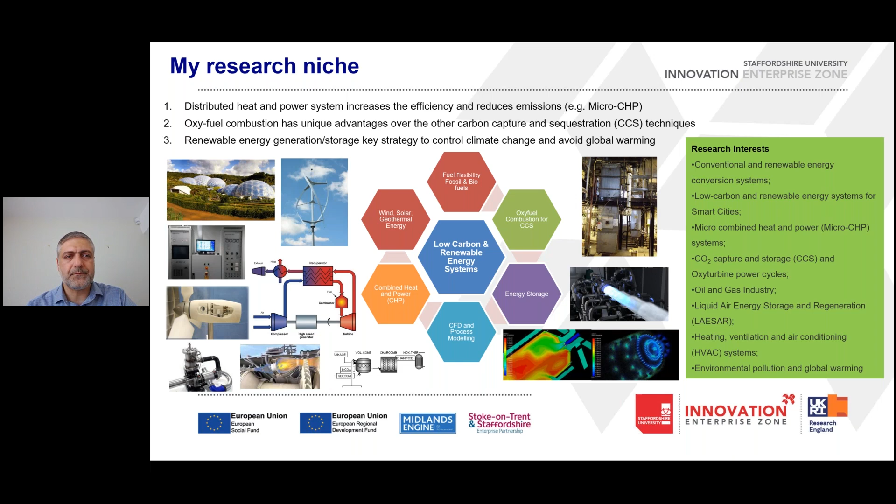The headline of today's talk: first of all, global warming. Is it real? Is it happening? And are we responsible or not?

We're going to talk about the Paris Agreement, which all nations came together to sign to tackle the issue of climate change and bring the increasing level of global temperature to less than 2 degrees, or if possible, well below 2 degrees.

I'm going to show you UK electricity sources live, because I want to show you the position of combined heat and power systems within the portfolio of electricity generation in the UK and worldwide.

Then we're going to discuss the benefits of micro CHP systems for small smart buildings. There are four major prime movers: fuel cell technology, gas engines (piston or internal combustion engines), Stirling engines, and micro turbine CHPs.

And at the end, just a glance at how micro CHPs are required to be part of a smart grid, in which they have to be connected and available in smart cities.

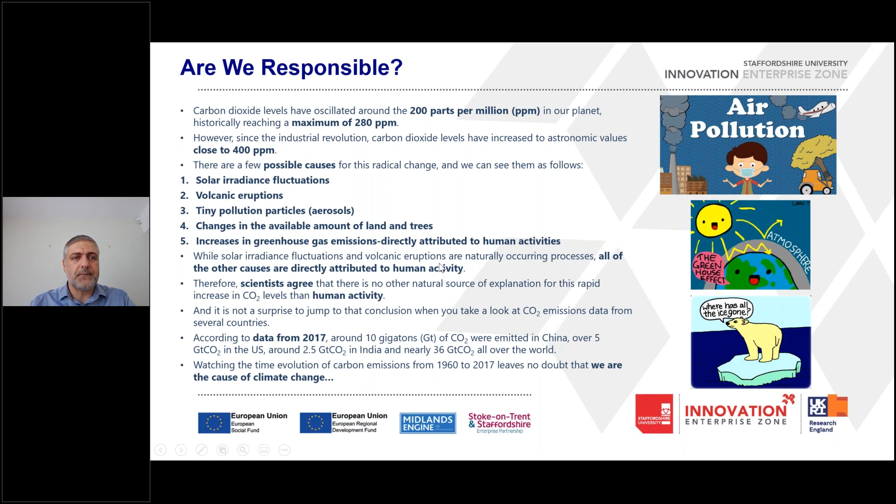Consequences of this increase in greenhouse gas emissions globally is going to be higher global temperatures, which will end up causing rising seawater levels.

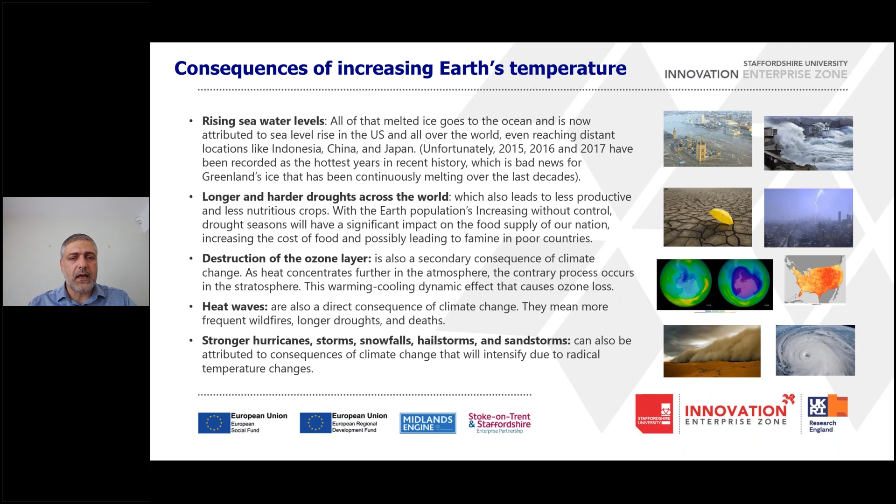We're already seeing longer and harder droughts across the world. There are destructions of ozone layers, all recorded and available. Heat waves are getting really challenging. Nowadays we see forest wildfires facing these heat waves and challenges of controlling forest fires. There are the strongest hurricanes, storms, snowfalls, hailstorms, and sandstorms, all evidence of the global warming that is happening.

At first glance, we think global warming is just a polar bear issue, but this is not what is happening already.

The Guardian has suggested we need to talk about climate emergencies, crisis, and breakdown. You see this picture in the Guardian, 17th of May - polar bears are approaching residential areas searching for food. This is really scary, what we see, what we're doing to our world.

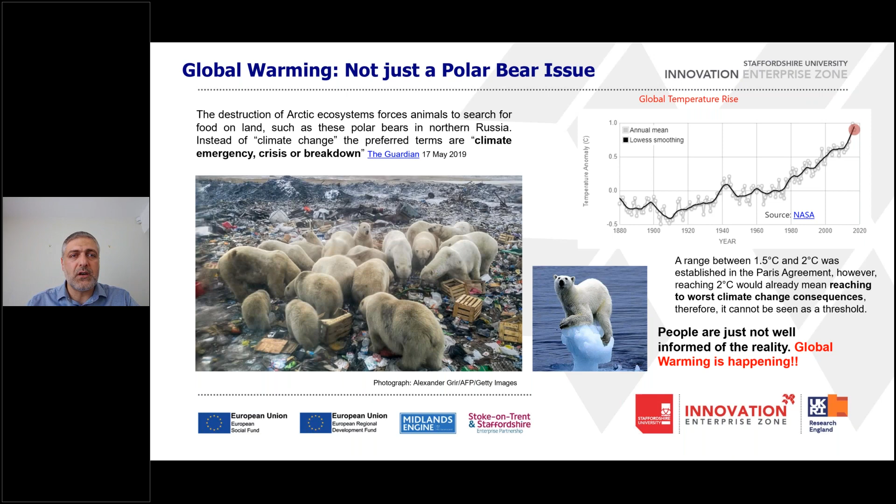Temperature recordings show an increase in temperature compared to pre-industrial levels, and this is because greenhouse gas emissions are being emitted day by day more than before. We have to control this temperature rise, otherwise we're going to see the crisis which I've indicated in the previous slide.

Fortunately, nations came together and agreed to control the temperature of the globe to well below 2 degrees C temperature rise, and if possible to less than 1.5 degrees.

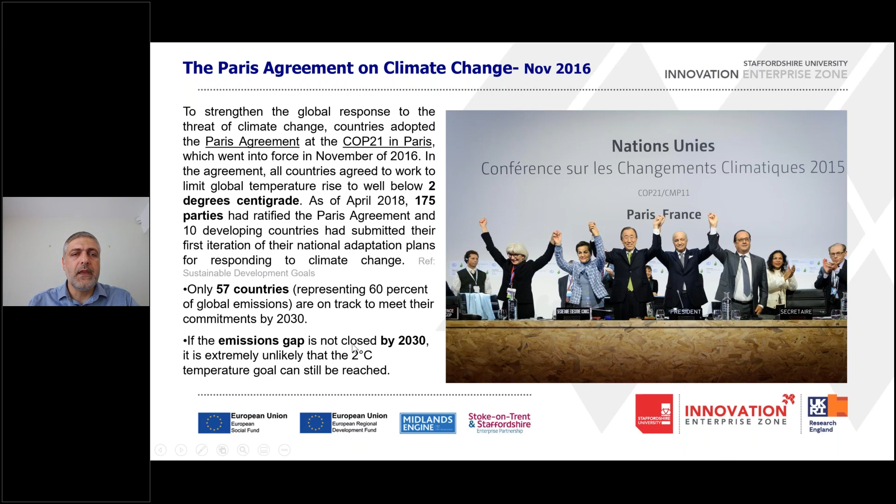This is quite important to see what technologies can address this and give us the opportunity to achieve this target. This is a report from the International Energy Agency, and it talks about the roles of different technologies in controlling the temperature to less than 2 degrees increase by 2050 and 2060.

The major technologies are: first of all, we need to use efficiency improvement in all combustion systems, in all power plants, in transportation, in industrial processes. So efficiency will have a share of 40%.

Using renewables will have a share of 35%. Fuel switching will have a share of 5%. Carbon capture and storage will have a share of 14%, and nuclear shows a share of 6%.

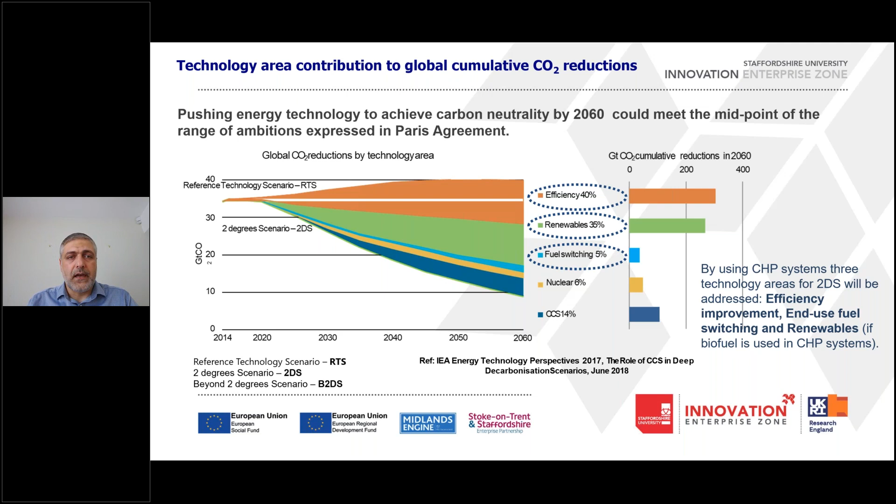Combined heat and power systems can play a positive role in ticking 3 boxes: efficiency improvement, renewables, and fuel switching. Today I'm going to give information regarding the available technologies which can help us remove or avoid carbon emissions by 2050 and 2060s.

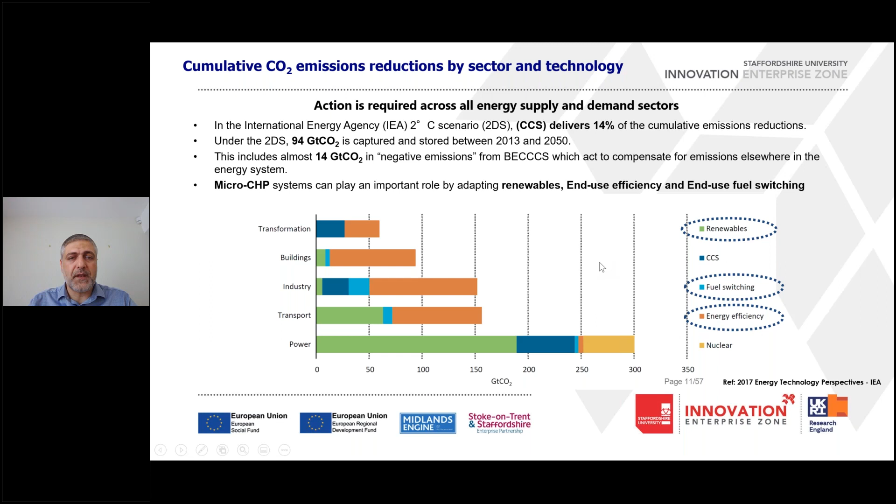This is one of the figures: 94 gigatons of carbon dioxide has to be captured or avoided by 2050. There are shares of different technologies, and micro CHPs and combined heat and power systems can play a very positive role in achieving these targets.

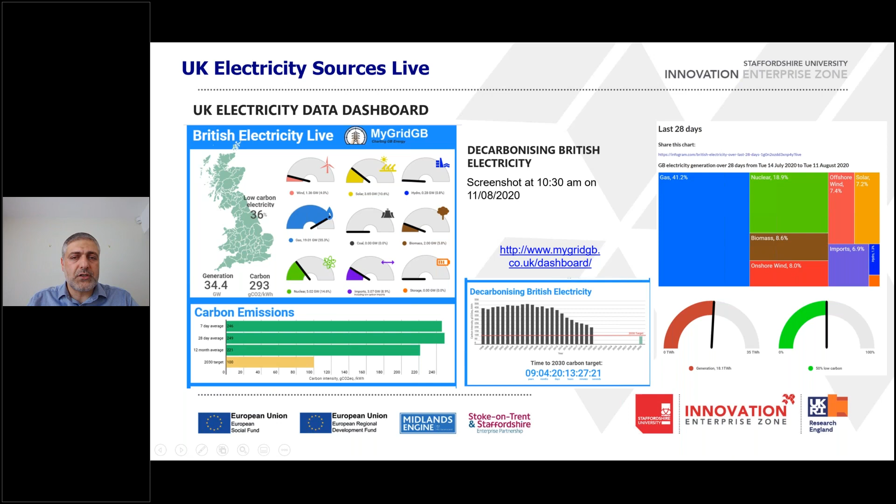There is a dashboard available which shows what the combination of different energy sources we're using is.

If you see this page, this is the live level - for instance, 3.7% of the current electricity right now comes from wind. Solar has got about a 20% share, which is quite impressive because of today's sunshine. Roughly about 50% comes from gas, and about 13 to 14% nuclear. Biomass has got a share of 5%. And as you can see, fortunately there is no coal combustion happening at the moment for British electricity live.

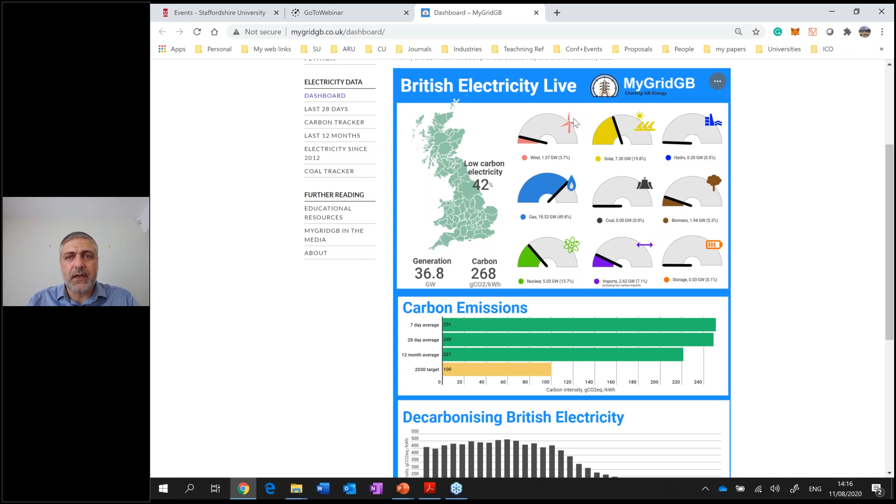There are targets on how to decarbonize British electricity. We're aiming to have 100 grams per kilowatt by 2030. Currently we are at about 220 grams per kilowatt hour of power generated.

So if I go back to slides, now why combined heat and power systems? I already mentioned the benefits of CHPs in terms of efficiency improvement. One of the major reasons for efficiency improvement is because we are avoiding transmission losses; in some cases it's 20–25% more efficient when we use a decentralized combined heat and power system.

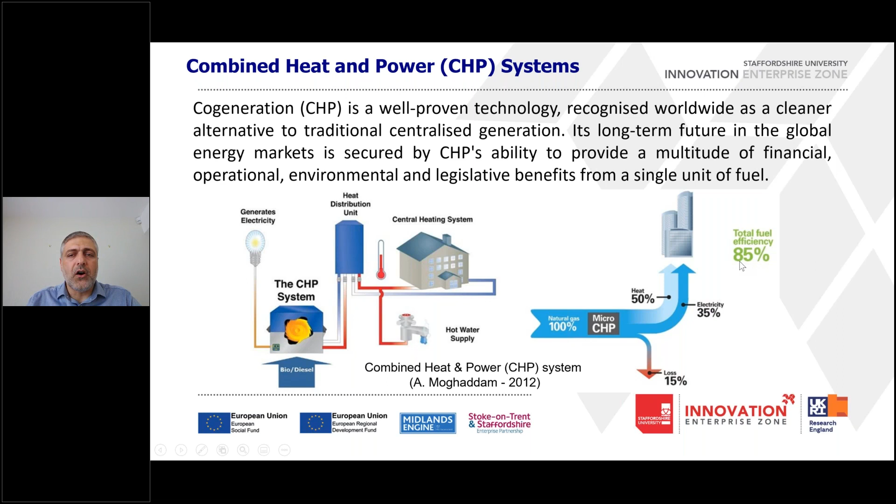There are also pictures showing us that this efficiency is even higher when we use a CHP system at a micro scale. That means in a building, we can have a boiler which can generate heat and, as a byproduct, generate electricity. There are different definitions for micro scale CHP systems, but what I normally use is that less than 50 kilowatts of electrical power can be considered a micro scale CHP.

In this diagram, for instance, if I need 6 kilowatts of heat and 1 kilowatt of electricity in a household, if I use centralized heat and power generation, overall efficiency is going to be about 78%. But if I use micro CHPs, overall efficiency can be as good as more than 95%. So micro CHPs are going to help in reduction of carbon dioxide emissions. It's going to provide a reliable energy supply.

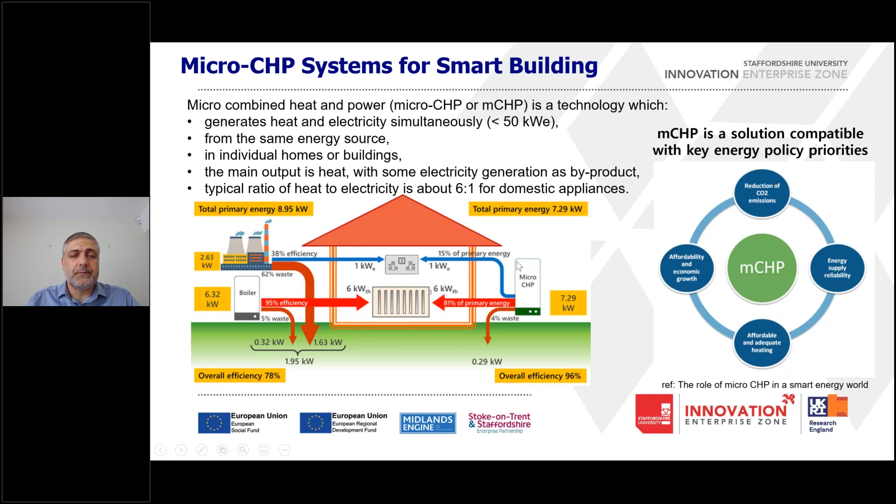It will provide some economic growth, so a household can sell or use the electricity generated within the household through available feed-in tariffs. For some countries, this feed-in tariff is helping households even compensate the initial investment in buying the micro CHP. Installation is normally easy. Servicing and maintenance costs are not much higher than boilers if the technology is fully established and if well-trained engineers are available in the market.

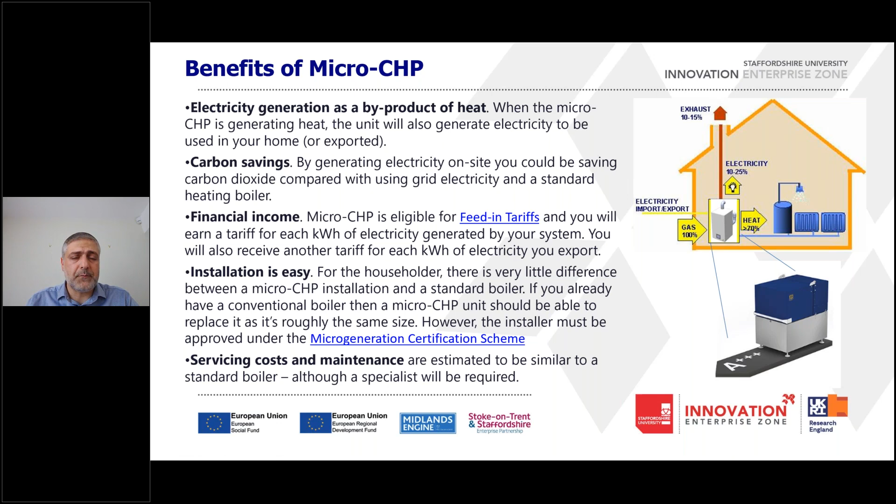And this is, as I said, a technology emerging into the market and into household heat and power generation options. What are the main competing technologies? We have identified 4 major competing technologies. The first one is fuel cell technology, which can be the core of a micro CHP. We are all familiar with fuel cells. They are the most environmentally friendly technologies. They use hydrogen as the main fuel source, and the output of the combustion is only water.

So no emissions whatsoever in terms of NOx or carbon dioxide. They do have quiet operation, but the challenge with fuel cell technology is the high initial price, and in terms of startup time to reach the ideal operation mode, there is a long startup time with fuel cell micro CHPs.

The second technology, which is the most available and most well-established technology, is gas engines. These are normal piston engine type core systems. They have a very fast startup time, but there are vibration and noise and a little bit of maintenance issue in the long term. Initial price is reasonable because, as I said, it's a well-established technology.

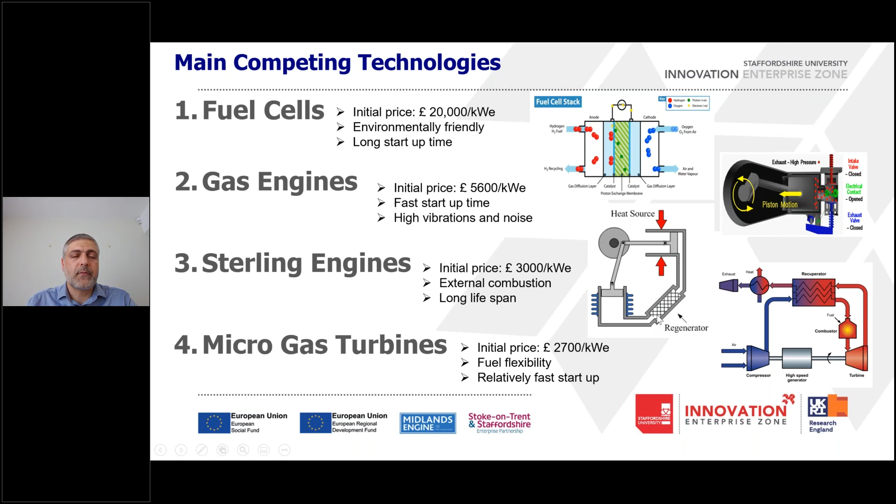And micro gas turbine systems, which is the area I'm mainly focused on in my research. This technology is the most recent technology emerging into the micro CHP market. They have the advantage of fuel flexibility. They have fast startup time, and the initial price is going to be really acceptable in the market because the main core can come from turbocharger systems, which are widely available in the market. So I'm going to give you a brief explanation and a few available products in the market for each core prime mover.

Fuel cell micro CHPs, as I said, can deliver more than 90% combined heat and power efficiency. I just want to emphasize this is a higher efficiency technology when it's combined, because we also consider recovering the waste heat from the system. So in general, they have very high efficiencies for household applications.

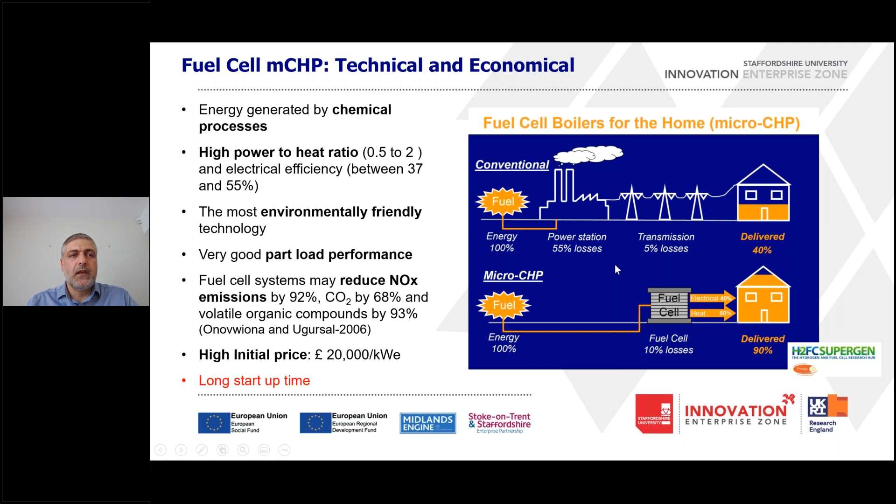Fuel cells: almost zero emission, highly efficient, high power density, really quiet operation, and they don't need any recharging. There are some disadvantages, as I said. The first difficulty is how to generate pure hydrogen for the fuel cell. That's a challenge we are facing even in the automotive industry as well. But new technologies are emerging into the market, and the efficiency of hydrogen generation is improving as we speak. So there is a better place for micro CHP systems with a fuel cell core.

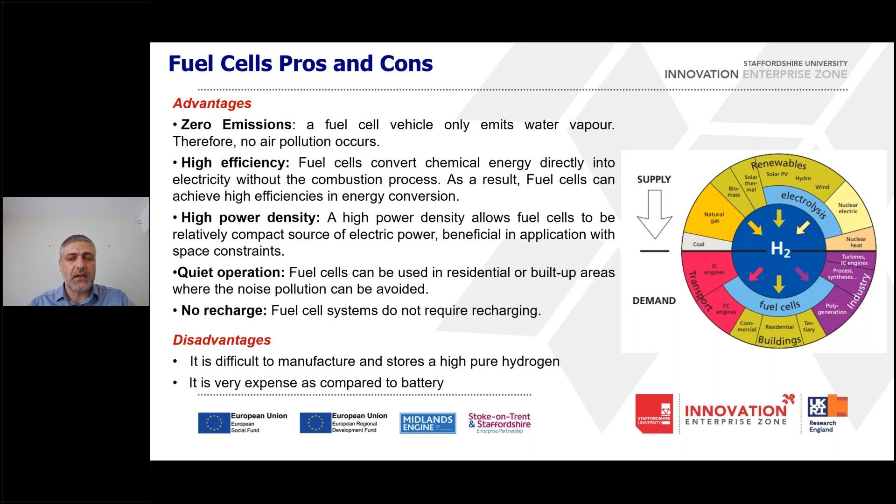They are still expensive, and researchers basically have to be funded to make sure we're able to offer good prices for this type of system. For instance, one of the first units emerging to the market was with Viessmann and Panasonic. They have introduced a 1 kilowatt electrical power and 15 kilowatt heat generating unit for household applications. One of the best and the most efficient micro CHPs in the market.

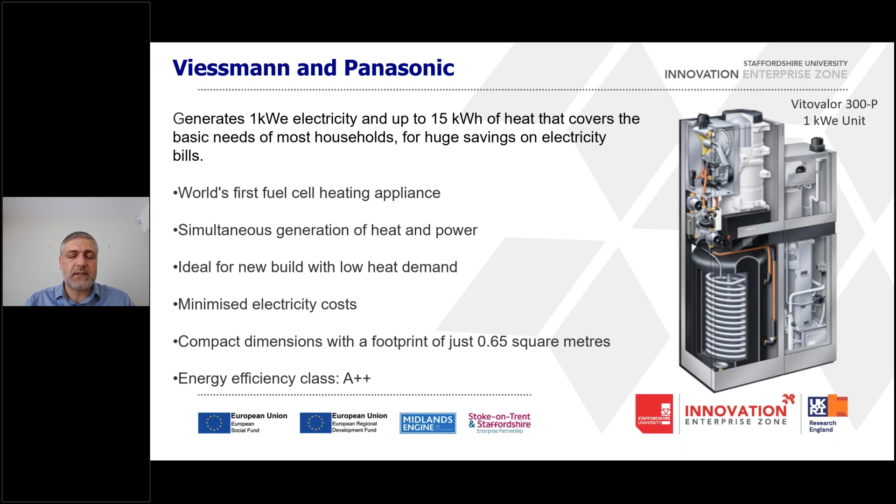As I said, the main challenge of this unit was price, and the company is facing challenges selling the product at the current price. But as I said, we need to have feed-in tariffs and support for the households, and research funding for the companies, to make sure we are helping introduce this type of product into the market because of the clear advantages of using these technologies to reduce carbon emission.

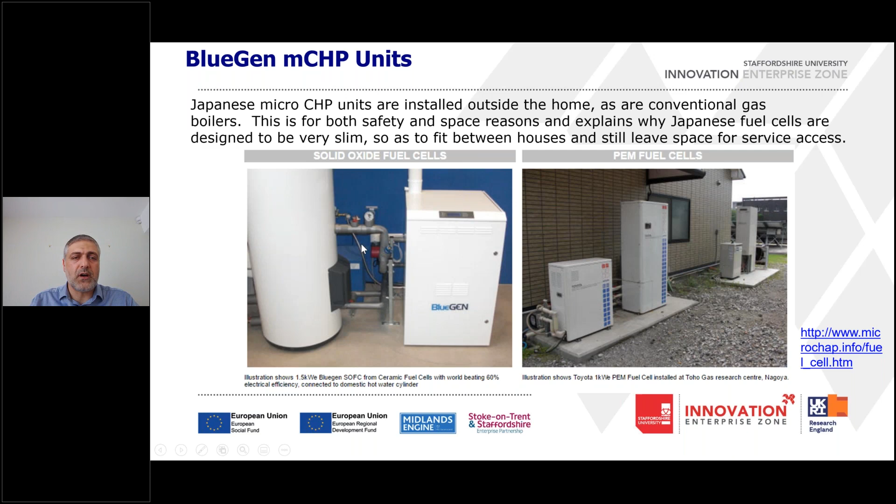There is another Japanese company. They have a product called BlueGen. This BlueGen can generate up to 1.5 kilowatt of electrical power for household applications. And as I said again, fuel cells do have several benefits in terms of environmental aspects as well as quiet operation.

The second technology, gas engines. As I said, this is the most advanced technology in the market. Piston engines have been around in the automotive industry, so it's a well-developed technology. This technology has a good price compared to fuel cells, but not as good as Stirling engines or micro turbines. And they do have relatively high vibration and noise, so in the majority of cases the unit has to be installed outside the building. But they are as efficient as other technologies. They can reach around 90% efficiency in combined heat and power mode.

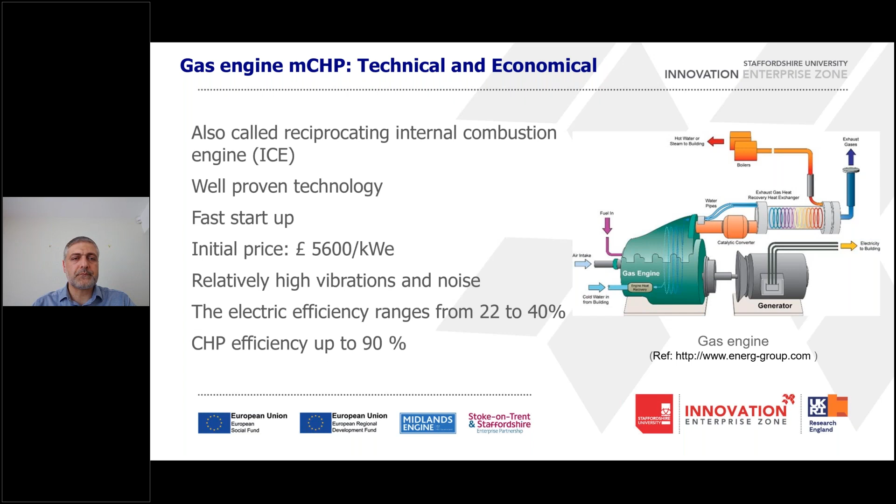One of the products in the market, the Yanmar product, ranges from 5 to 25 kilowatts of electrical power generation output. As I said, the overall efficiency of Yanmar products is announced as 85%. And they do have really good maintenance intervals, about 10,000 hours, and engine life over 60K hours per 10 years, which is quite good operational time.

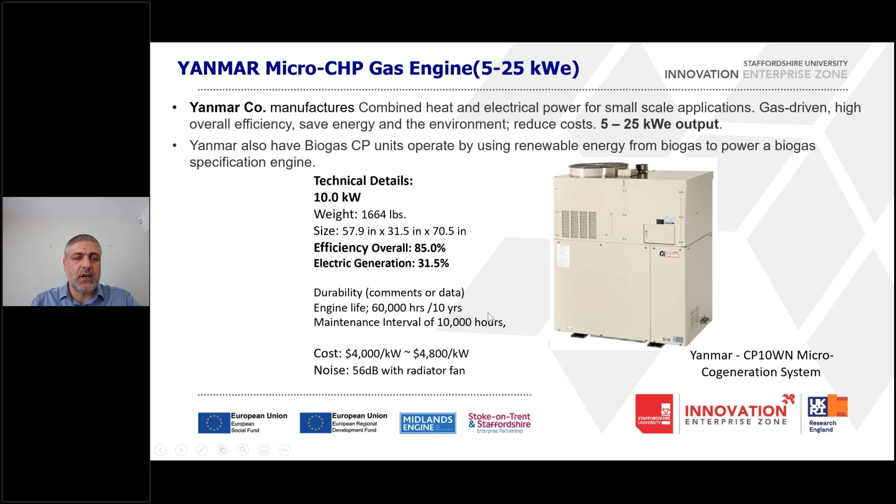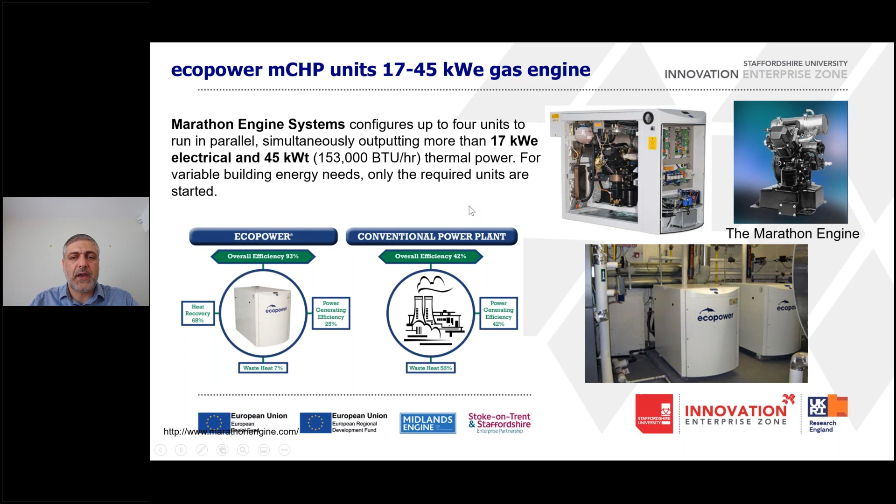Another company, ecopower, actually has a micro CHP generating between 17 to 45 kilowatts of electrical power. The core of the engine is a marathon engine system configuration, and it also generates heat as required for heating purposes in household and domestic applications. It can even be used for factories or farms. So depending on the size, we can use this type of decentralized heat and power system for different applications.

There is also the Vaillant and Honda micro CHP using gas engine or piston engine technology. This has 1 kilowatt of electrical power and 2.5 kilowatts of heat generated by the system.

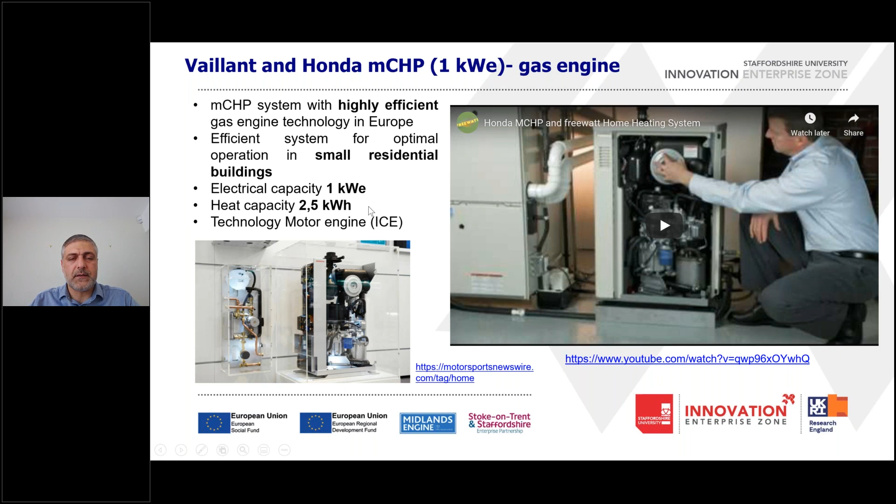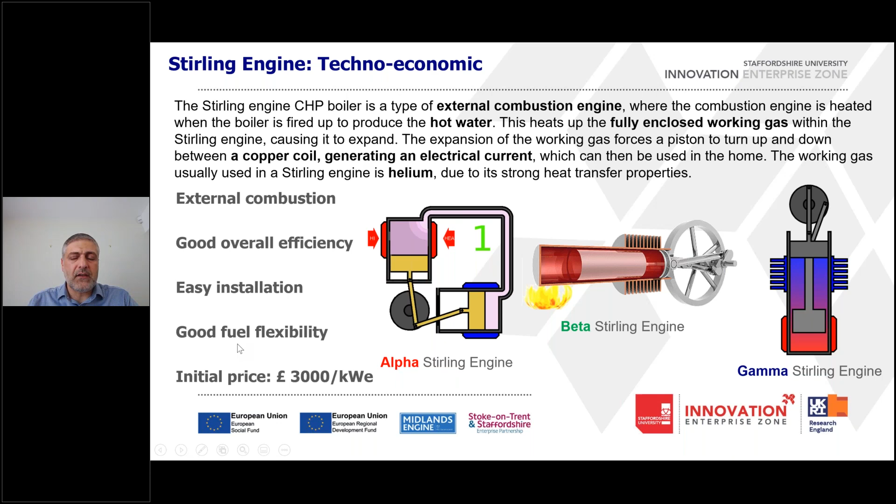The third technology, which is one of the most promising technologies as well, is Stirling engine systems. As I said, the Stirling engine has been around for many years. There are different types of Stirling engines: alpha, beta, and gamma type. These engines accept external heating, and that's one of the main advantages of this technology, because it gives us the option of external combustion. External combustion means we can burn literally any type of fuel, from fossil fuels to biofuels, solid, gaseous or liquid, or biodiesel or bio-oil type fuels. The initial price is fairly good, and the overall efficiency is also acceptable.

The best product available in the market is Baxi Ecogen. Baxi managed to launch their first product in 2010. They used a patented free-piston Stirling engine configuration. And this unit, as I said, is able to generate 1 kilowatt of electrical power and from 6 to 18 kilowatts of heat. There are supplementary burners in case the household requires further heat; the supplementary burner can be fired and provide further heat to the household.

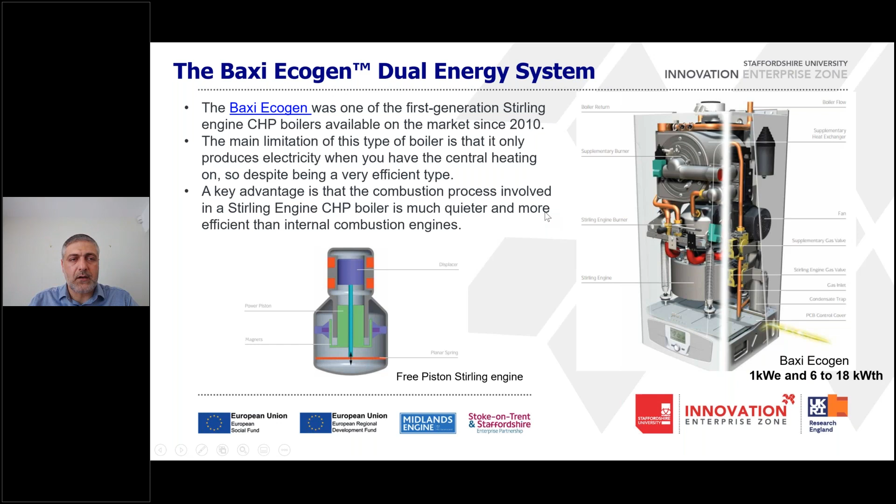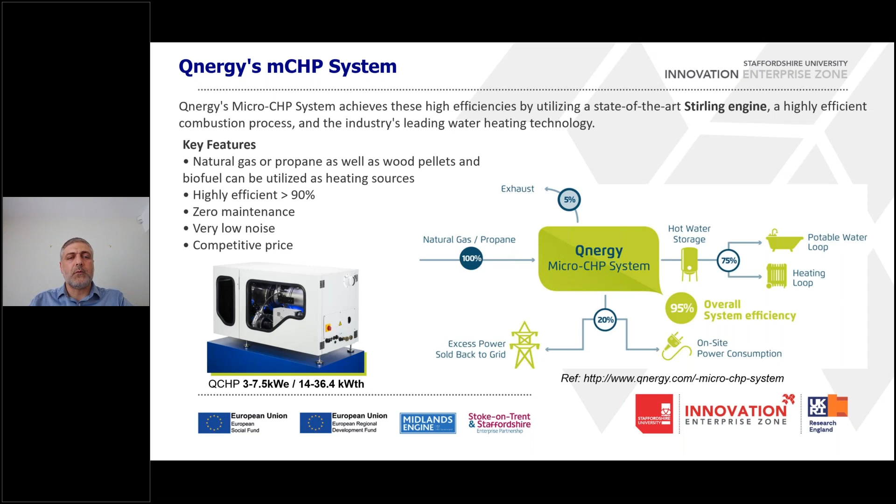There are also Qnergy micro CHP systems available in the market. This system can generate up to 7.5 kilowatts of electrical power and up to 36 kilowatts of heat. A very efficient system, more than 90%, very low noise level, and maintenance intervals are quite wide. So it's a good option for domestic applications to use this type of micro CHP.

But as I said, the most advanced and recent technology emerging into the market is micro turbine systems. A micro turbine is literally a very small gas turbine. We're using a compressor, a recuperator to increase the temperature of compressed air, and then a combustion chamber which is going to burn fuel at elevated pressures, and then a turbine to generate work and spin a high-speed generator and generate power.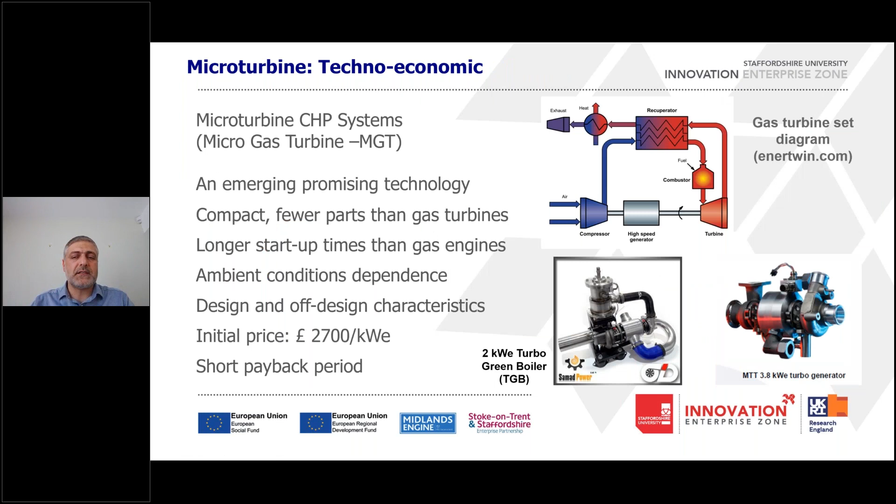This is a very small scale gas turbine, as I said, and there have been challenges which companies working in this field like MTT and Samad Power try to address, the challenges of high-speed RPM. In some cases it goes as high as 250,000 RPM, which requires a high-speed generator, and all the electronics as well as all the bearings need to be able to accept this level of RPM. It's been sorted. The products are available in the market.

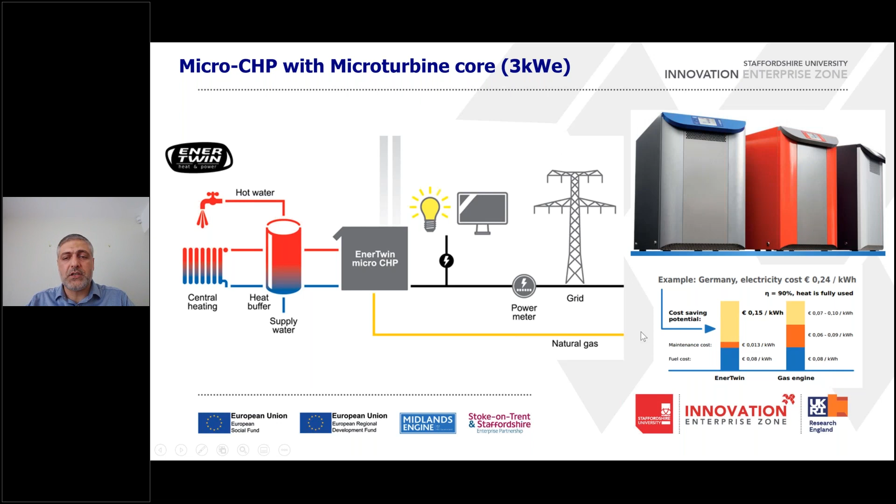Micro CHP from MTT has been launched into the market and is available to be purchased. From the EnerTwin units introduced by MTT, there are graphs that show it's competitive compared to gas engine systems, and it can provide lots of potential cost savings due to lower maintenance. Looking at the technical data, as I said, we have high rotor speeds as high as 240,000 to 250,000 RPM, but there are going to be emission advantages.

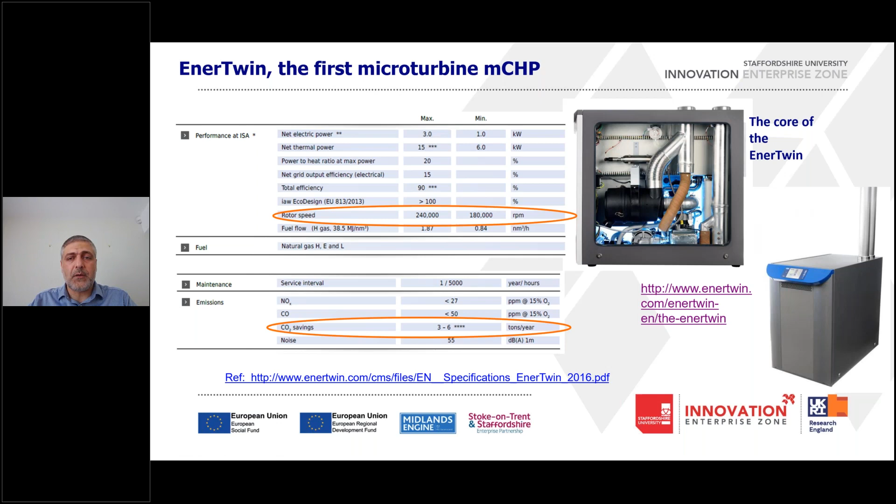A minimum carbon dioxide saving of between 3 to 6 tons per year for one unit of this 3 kilowatt unit for a household application is calculated and predicted, which is quite impressive. Also, these micro CHPs have benefits of higher efficiencies in terms of being decentralized. We don't have transmission losses. We're not going to have challenges of maintenance and disruption of centralized heat and power generation, which we might face.

For instance, if a town is relying only on electricity from the grid, or factories are relying on electricity from the grid, they might be facing some uncertainties if we don't have a reliable grid available. One of the main companies in the market having a big share of micro turbines is Capstone. They have a variety of products in the market from 30 kilowatt electrical power to 1 megawatt power.

Just bear in mind, Capstone is not offering micro CHP. They only offer power generation. So these units can be adapted for micro CHP purposes, and the design is quite advanced. It's quite a small scale and condensed design of the core of a gas turbine, but they don't have products as micro CHP.

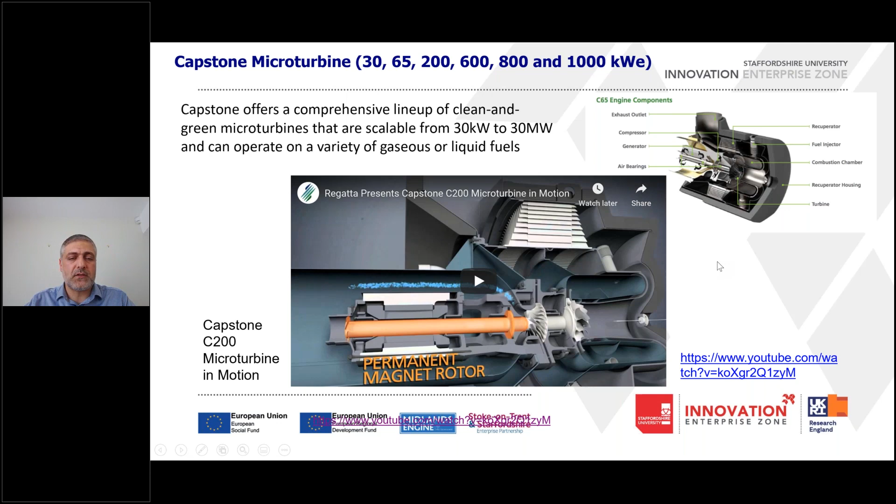To add benefits of micro CHP systems, it's better to also introduce renewable fuels into micro CHP systems. So we're ticking another box of renewables based on the IEA report, as I showed you before. 35% of the share of that 2-degree scenario by 2060 is going to be having more renewable energy sources available in the market. Micro CHPs are capable of accepting different renewable fuel sources, from biomass, from biogas, and bio-oil or biodiesel.

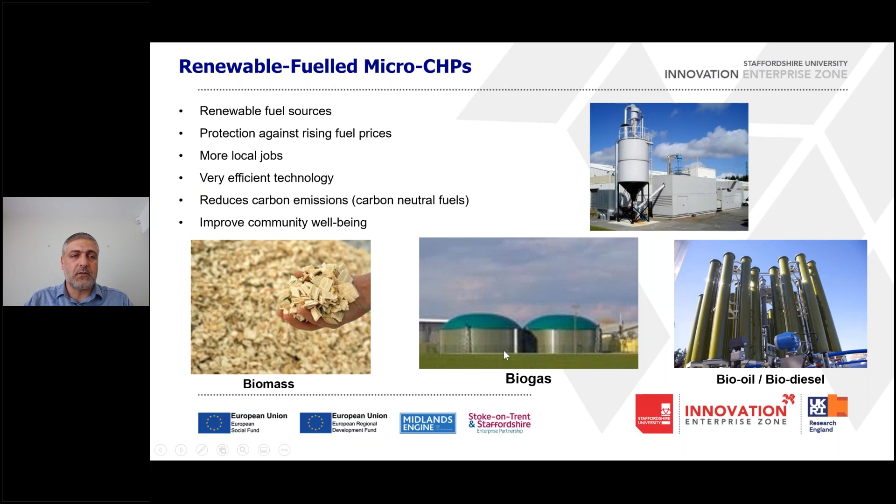In my research work, I have had the experience and the positive opportunity of working on introducing solid fuels into the core of micro CHP systems in a project called Turbo Bio Boiler. The project was a feasibility study as well as process modeling of how to introduce biomass into a gas turbine core by external combustion. The feasibility study and process modeling showed that the technology is viable and we can use external combustion for micro CHP systems. And if further funding is secured, it can go to the next stage.

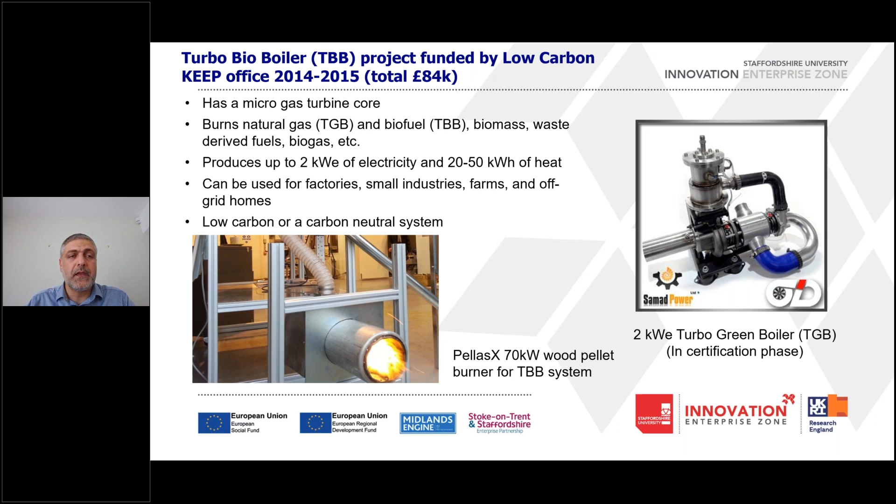Another project I've worked on as project PI at Staffordshire University was an industry-led project, funded as part of Energy Catalyst Round 4 mid-stage, by a company called Bladon Micro Turbine. At Staffordshire University, we were responsible for converting the diesel combustor of this 12 kilowatt unit to burn biogas instead of diesel.

So literally, when we talk about biofuels, we are talking about a carbon neutral fuel, which ultimately has a very positive effect in carbon reduction of any genset burning fossil fuel, which can be replaced by biofuel and avoid that level of emission. The project was really very successful. We designed, CFD modelled, manufactured and tested these combustors, and Bladon Micro Turbine has the product and contracts to sell it to customers as we speak.

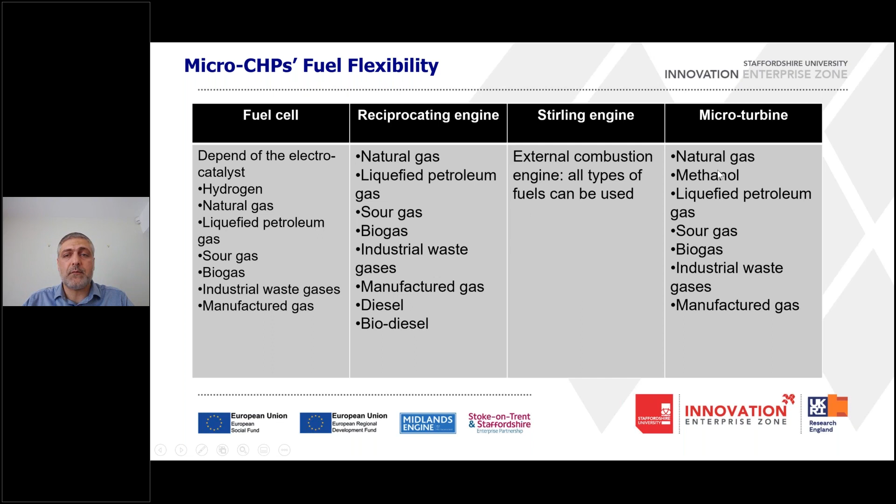In terms of fuel flexibility, all micro CHPs are fuel flexible, some more than others. For instance, Stirling engines and micro turbines are winning in terms of fuel flexibility. I've made a table which shows pros and cons of different types of micro CHPs.

A comprehensive study is required, using multi-criteria decision analysis, to choose the best option for certain applications. So for a house, a group of houses, a tower, a factory, or a farm, we might choose different engine cores depending on availability of fuel, initial cost, and maintenance cost.

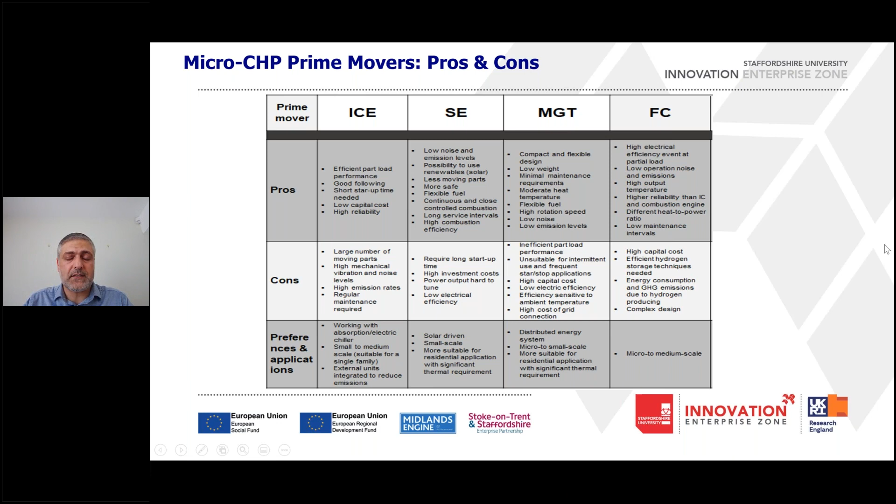It's important, if we introduce micro CHPs into the market, to make sure we have a smart grid in smart cities, capable of receiving and selling electricity to the grid. This is going to be the future of smart cities, having different types of renewables from wind to solar, electricity from the grid, geothermal energy, as well as high efficiency combined heat and power systems for the household and for domestic applications.

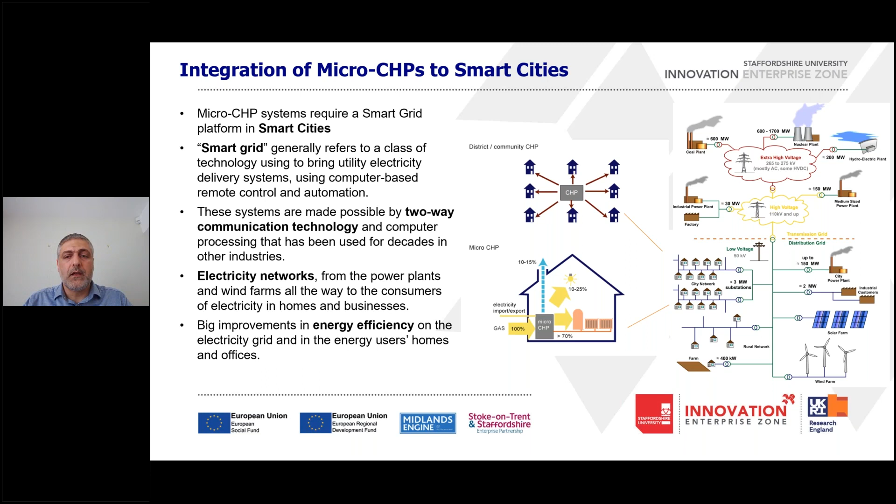To summarize my talk, micro CHPs make an active contribution to environmental protection due to higher efficiencies and significant reduction in carbon emissions. Micro CHPs are one of the most cost-effective methods of utilizing gas to generate electricity at the domestic level.

There are four major technologies: fuel cells, internal combustion engines, Stirling engines, and micro gas turbines. Fuel cells are the most environmentally friendly technology. Stirling and micro gas turbine systems are competing technologies, offering lower cost, very fast startup times, and fuel flexible systems.

Government support is required, using renewable heat incentives or feed-in tariffs, to support end users in adopting these technologies. Micro CHP systems are well-proven, recognized worldwide, a cleaner alternative to traditional centralized power generation, and they have to find their way to the market as soon as it's viable and possible.